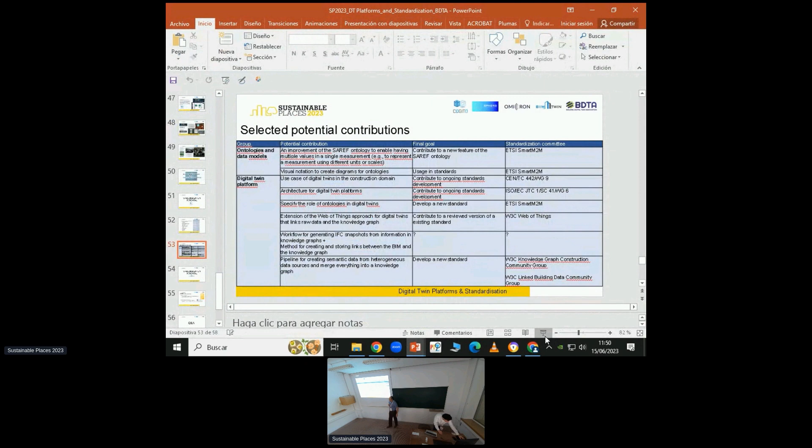Another thing we've been developing is the visual notation for creating diagrams for ontologies. Here it's not something we're going to make a standard of, because that would take much more time - we can talk about this after the end of the project, but it's something we can start applying, for example, with SAREF.

Regarding the digital twin platform, we have use cases of digital twins in the construction domain, and here we can contribute to ongoing standards. ISO subcommittee 41 on IoT and digital twins has been collecting use cases and making a technical report. We contributed one use case there, in working group 9 of the CEN committee, and have now submitted it. These are places where we can support standardization.

Another thing is the architecture for digital twin applications. Right now in ISO, the process is starting to define the technical report on architecture for digital twins - the work just started, and the plenary meeting this week is like the launch of the table of contents and things like that. It's not led by me, because I'm establishing liaison with this working group - I can give you the name of the editors.

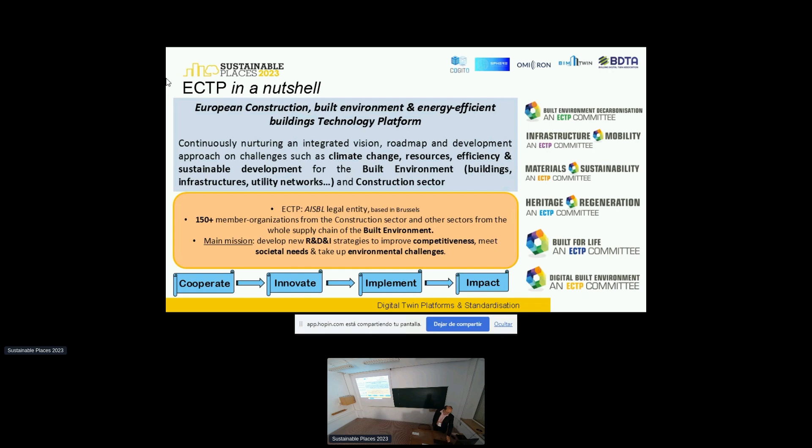In this context, like for the other committees, we develop position papers on a regular basis that are used to identify, at a given point in time, every 3 or 4 years, what are the new key trends and challenges, what are the high-level objectives we want to tackle in terms of digitalization for the construction sector, and what are the research and innovation needs. We try to identify also the connection with other ECTP committees and topics, as well as external initiatives. This is to feed the ECTP strategic research and innovation agenda. We had a new position paper in 2022 at summertime, and we finalized it.

One point which definitely raised is related to this concept of digital twin. The idea is that our view on the digital twin is that it's going to be a real dynamic view, but under a virtual form, of what is the reality around buildings or around a district or a city. So it's considering and including all the BIM aspects, which you are all familiar with, but it's also the need to extend BIM data management with dynamic and evolving management of building-related data, the need to network or link data among them, and the need to deal with semantic integration of external knowledge.

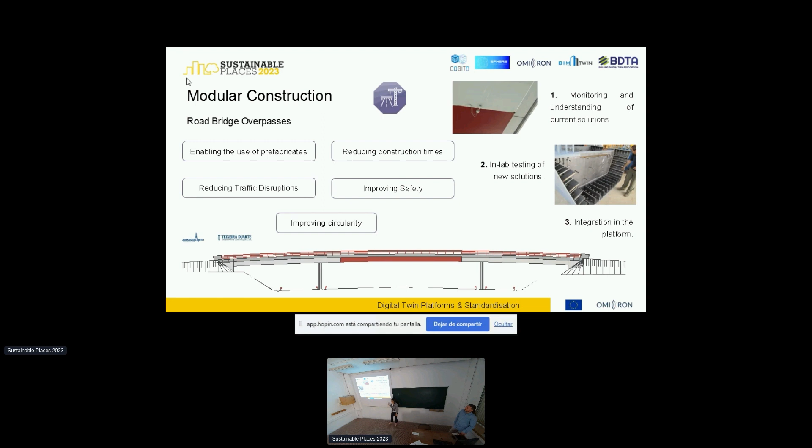What we do here is design a piece for better connection of the concrete and steel parts. The stages we follow: first we do monitoring on similar bridges to understand the problem, then we do designs and lab testing, and finally we are at the last stage now, finalizing the design, which is going to be integrated into the digital twin platform.

A relevant part of our platform is to integrate information coming from digital inspection. Here we have inspection coming from drones. We work on multi-UAV inspection and also long-range capability, working on a tech-enabled system.

We are also developing an innovative combination of cameras on board commercial vehicles for better assessment of the pavement. And as I said, we also develop V2X communication to allow communication between the maintenance crew, the control center, and also regular users.

We also develop robotic and automation procedures to facilitate the execution of ordinary, extraordinary, and emergency maintenance actions. Regarding robotization activities, we have developed a robotic modular platform to perform activities such as safety barrier replacement, safe signaling during construction, installation of cones, sealing of pavement cracks, cleaning of assets, and removal of lane markings. We are also working on automating the process for pavement rehabilitation.

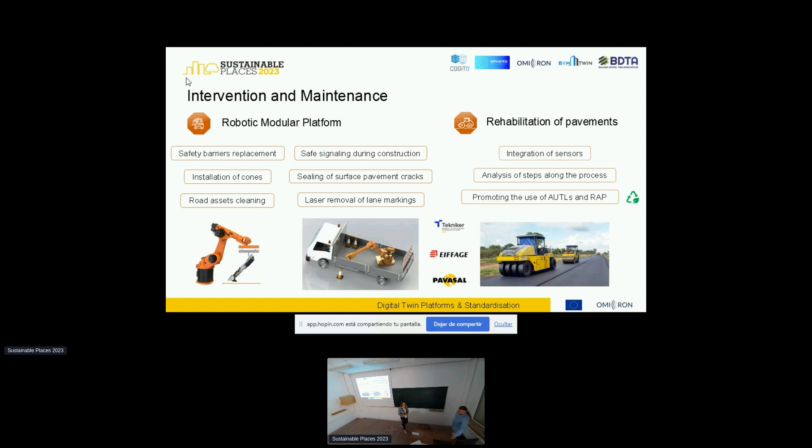In addition to the robotic activities, we develop augmented reality tools to support the workers in the use of the robotic modular platform, and we also develop virtual reality tools for the remote operation of the robotic modular platform and for the training of workers.

Finally, you can see the core of OMICRON's digital twin, composed of the digital twin itself and a road decision support system. Here you can see a visualization of some development we have for our digital twin. In this case, these developments are done in a platform developed by CEMOSA. It is not totally the OMICRON project, but follows the same procedure.

So in our road digital twin, we integrate the variety of information that we have. It is based on a BIM GIS environment, and it allows the integration of all the information and provides analytics capability.

And then connected to the road digital twin, we have a decision support system which assesses the road condition, forecasts the future state, suggests the best maintenance option, and optimizes the allocation of maintenance tasks.

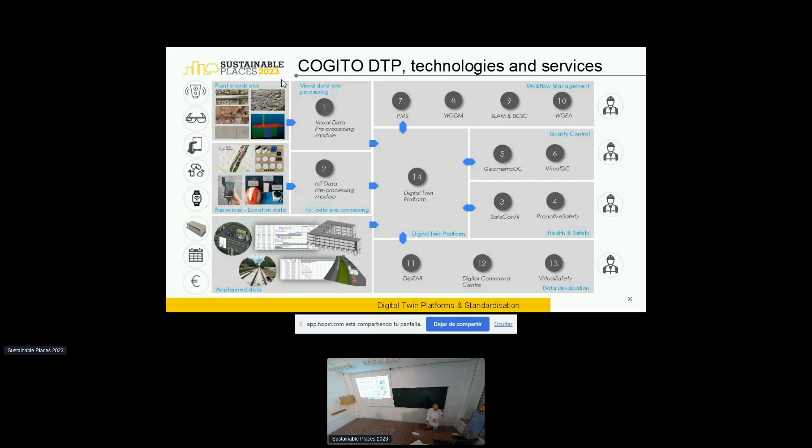The service level agreement manager and the blockchain smart contracts, and the work order execution application. We'll see details on those components in a few minutes.

So based on this conceptual information flow, we put a lot of effort into developing the architecture of the COGITO solution, where the interactions between the various components are detailed. We developed use cases and sequence diagrams that present, for each use case, the interactions between the various components. We decided, to make the conceptual architecture more reasonable and simple, to split it into two phases: the construction phase and the planning phase, where several components are involved at each phase.

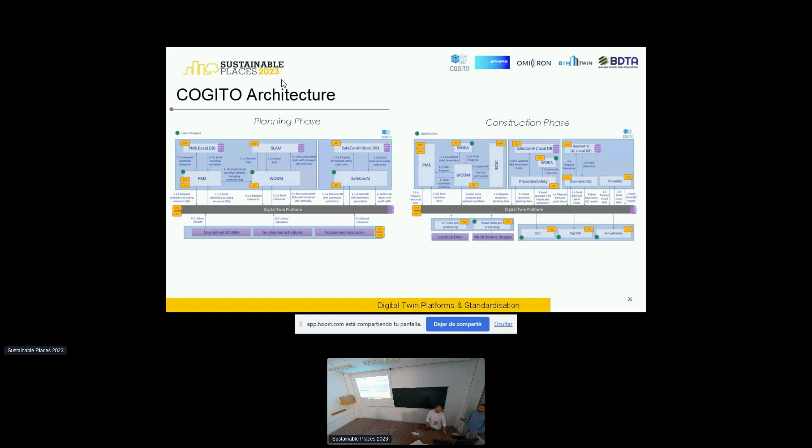I know you cannot read the text here, and that was not my intent. But it would make sense, if you find the architecture and its details interesting, to access the relevant deliverable on our website. So let's see the components in more detail.

I'll try to be quite brief, and I'll start with the digital twin applications for health and safety.

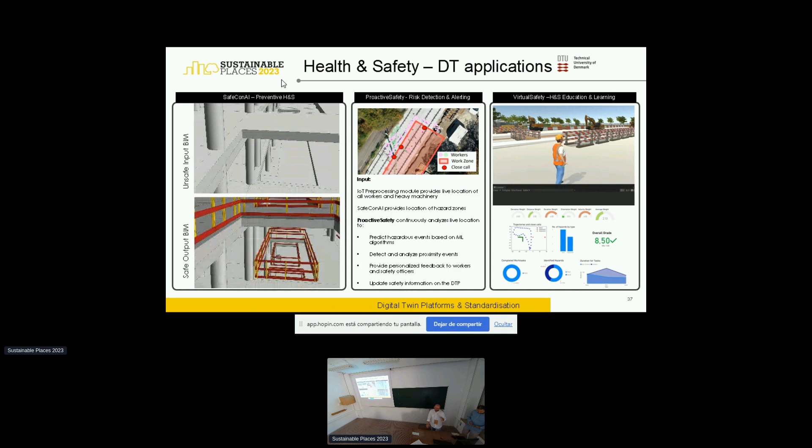On the left side, we see the SafeCon AI tool, which is applied in the planning phase for preventive health and safety, where we take as input an unsafe BIM, the output of a BIM authoring tool developed following the guidelines I mentioned before. Using specific algorithms that run on the backend, this input file is enriched with safety elements. In the video displayed, we saw how the algorithm detected hazardous areas and fall zones, and placed safety elements like railings on those zones.

The second digital twin application for health and safety is proactive safety, an application for risk detection and alerting. This component takes as input the safe BIM delivered and exported from SafeCon AI, combined with location data acquired on site, to detect proximity to hazardous areas and alert end users through specific devices they are wearing.

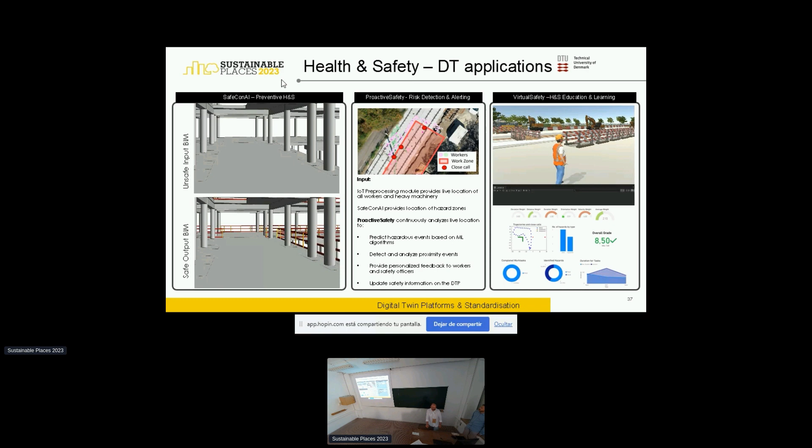Moving now to quality control, here we have four main components. First, we have the visual data pre-processing app, where we check if the video is running.

Do you have access to a mouse? No. Sorry for that, maybe I can show you the video afterwards.

The visual data processing app is a web application to curate the visual data I mentioned before and establish the linkage between the BIM elements and the data acquired on site. For example, when we scan a specific area of the construction site, we need to know how this scanned area is linked to specific BIM elements captured in IFC format. This is the tool used for curating this data. Apart from linking data acquired on site with the BIM data, there are other ways to also process the images so as to ease later use for defect detection and inspection.

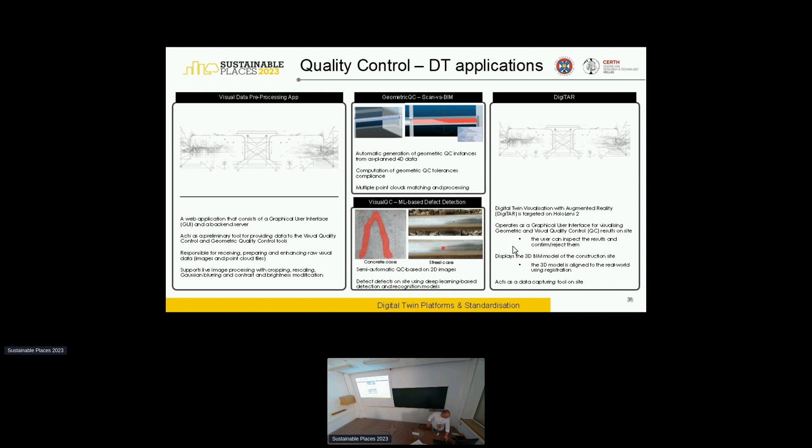Last, we have the DigiTAR application, developed to run on HoloLens 2, using smart glasses on site. The inspector or surveyor could go through the site and see annotated results from the geometric quality control and the visual quality control, and confirm the existence of such quality control results. If, for example, some defects were detected, they need to be confirmed by an expert. So we put points on where those quality control defects are located, and then the expert should visit the specific area and confirm that this defect actually exists.

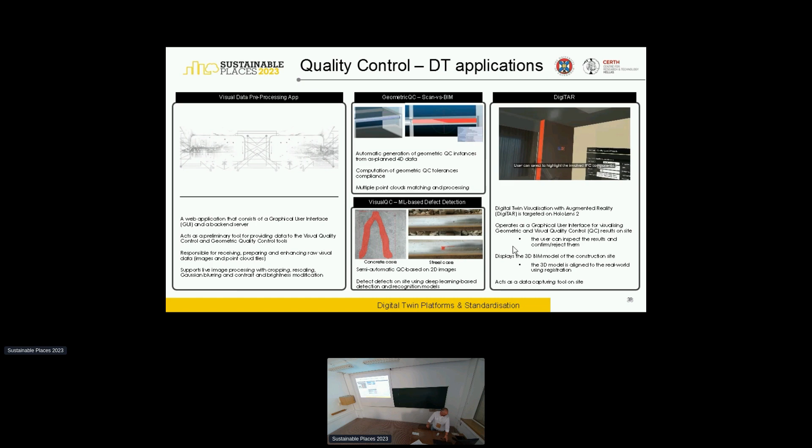Next group of digital twin applications are digital twin applications for workflow management. Here we have three main components.

The first one is the process modeling, simulation, and optimization, where we define the details regarding the workflows, the tasks that the workflow involves, but also optimization services. Through optimization algorithms running behind the scenes, we receive information about the optimal number of resources, where those resources should be allocated, and which is the critical path - all relevant to optimizing the schedule and minimizing the time and cost of the construction project.

Apart from the PMS tool, we also have the work order definition and monitoring tool. Again, it's a web application. We take as input the result of the process modeling and simulation environment and the optimization result. The user of this tool tries to assign real resources - specific people, specific equipment - to specific tasks, so that they can be monitored. Through this application, you can monitor progress on specific tasks and activities.

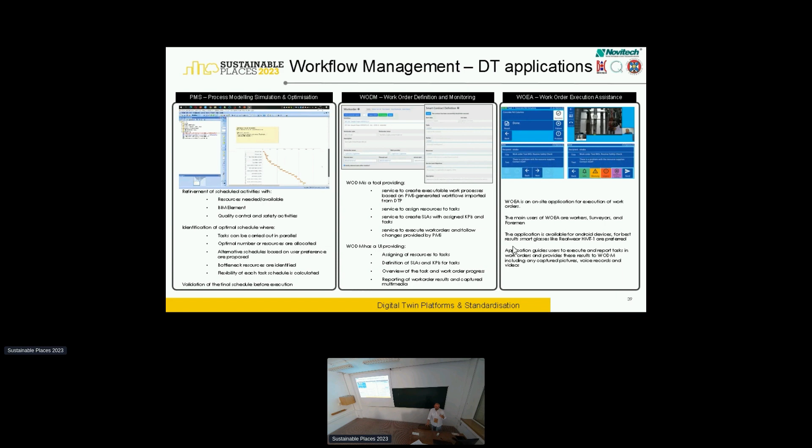As we mentioned before, all the data handling and communication between the various components developed within COGITO are managed by the digital twin platform. The digital twin platform is the core of the COGITO solution.

For its development, we followed UCL, who was leading this effort, in collaboration with UPM, who developed the data model and the ontology required.

We followed a multi-layer architecture, a six-layer architecture, consisting of the authentication layer, where this layer ensures that access to resources and applications is limited only to those end users who have access to these specific applications or resources.

The data ingestion layer is responsible for loading the input of data through the digital twin platform, but also running quality control for that data - the quality control checks, model checks, model completeness, correctness, consistency checks - and also the generation of the knowledge graph.

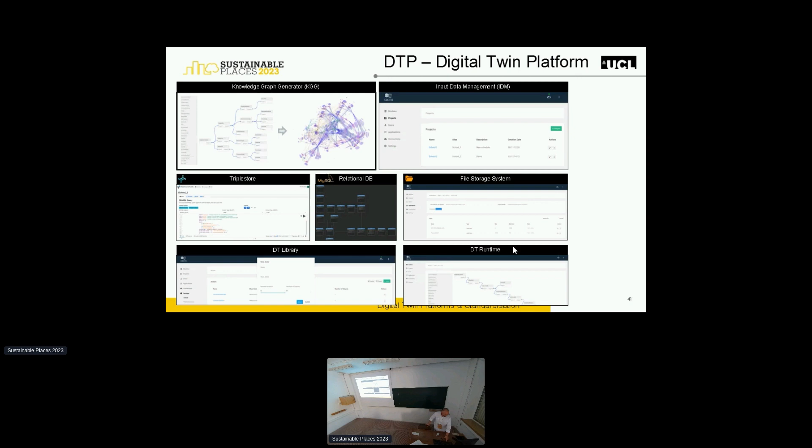Regarding the post-processing layer I mentioned before, some examples here are the BREP generation - how IFC information is converted to OBJ files to be imported in graphics engines and readable for Unity, for example - the geometry clash checker to detect clashes between elements if there are any, and the IFC optimizer, where we take the IFC file and try to reduce its size while keeping the resultant file consistent with the IFC schema.

And how we perform the model view definition checker as an individual component, to ensure that the data provided in IFC is complete with regard to the data requirements of the project, and consistent with regard to the IFC schema.

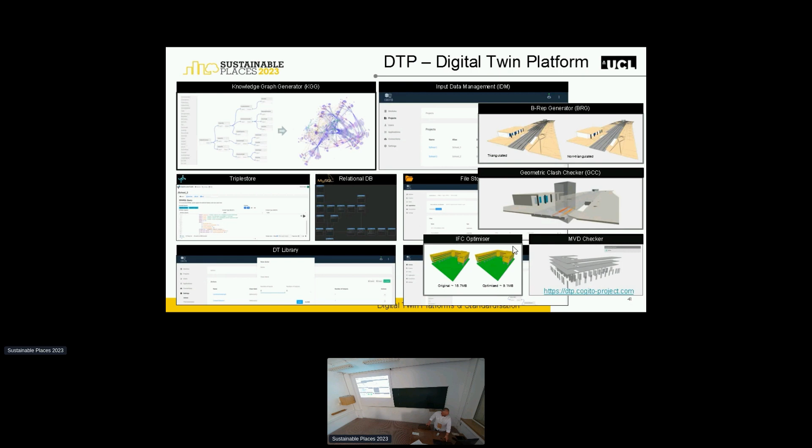This is my last slide, sorry if it takes longer than expected. The last tool is the visualization application for all the data collected in the digital twin platform. We call it DCC, Digital Command Center, and it's again a web application developed in the Unity game engine.

The different results of the digital twin applications are displayed in different overlays: the quality control overlay with regards to quality control results, the health and safety overlay with regards to health and safety application results, the location tracking overlay with regards to location data, and finally the progress, the workflow management application results in the overlay you see here.

You also have the possibility to filter the data through this user interface, based on the as-planned data or the as-built data. So maybe I'll go...

And the video was about that. So I'll skip the video and we can see it later on my machine, if you are interested.

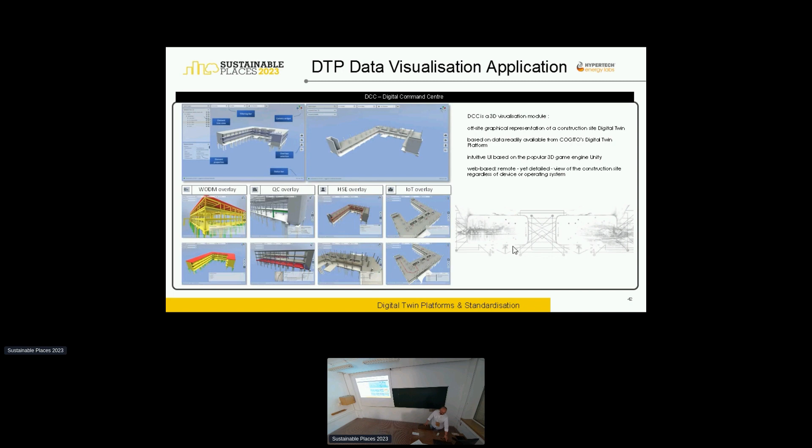So can you please take the floor? And now we will see the details of the BIM2TWIN project.

Okay, thank you. Well, these presentations raise a lot of questions, at least from my side, I'm trying to note them. That's good. So before starting, trust me, when we submitted the BIM2TWIN proposal, we did not copy COGITO documents, I swear.

As I said, in BIM2TWIN we are focusing on site activities for buildings, and our main components are on this slide. First of all, we have the digital twin platform, where several services are connected on top of it. These services either pre-process or post-process the data, as George also mentioned.

As input, we take into account the as-designed and as-planned projects, so BIM files basically and plannings, and we put that into our platform. It means we are translating IFC files or MS Project files into graphs, because the underlying technology is linked data technology, so we are based on triple store solutions.

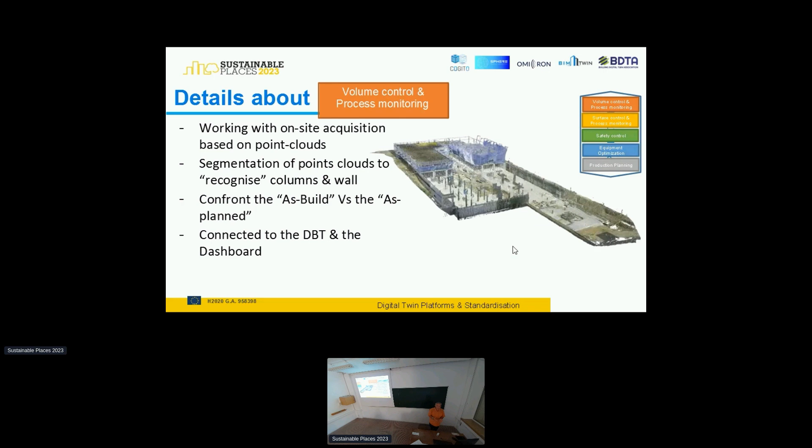based on learning techniques and with a little bit of artificial intelligence, let's say. And everything is connected to the dashboard, so to the platform, and then to our dashboard, in order to say, okay, I can update with this acquisition, I can update the KPIs concerning the quality of the volumetric aspect of my project, and I can also display on the 3D part of my dashboard where the columns are that are effectively erected at the right place, or the defaulting ones that were not erected or erected at the wrong place.

The second service is about surface control and process monitoring. I didn't put words also on the process monitoring aspect of the previous one, but you can imagine that as long as one column is detected as having a defect, it has an impact on the task belonging to this column, or the column belongs to a task, and then there is also an effect on this task, and that has an effect on the last service I'll talk about, the planning optimization. So everything is linked.

Going back to this surface control and process monitoring, we are not working with point clouds, but we are more focusing on image processing. So we have developed image recognition techniques in order to identify the built objects, like you can see on this picture.

The idea here is to say, okay, I can recognize that there are rebars, meaning we have started the construction, but it is at an initial level. We can see also some of these columns that are already done, meaning we are at a higher state in the construction, we have progress. And in between you have this middle status, where I don't know if there's some pouring concrete in it or not, but it's an intermediate status.

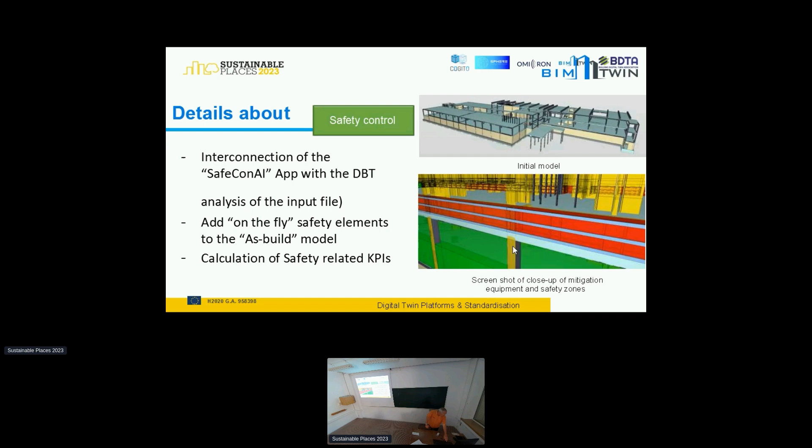We also have a service specifically focusing on equipment optimization. It's based on image and camera recognition, where the activity of equipment is recognized. They work on trajectory calculation in order to optimize the use of these big trucks and heavy equipments, but also to cross this information with safety information, analyzing if trajectories go too close to a worker's area to prevent risk.

This service works with animated images, so the camera works from videos, and is linked to the safety component in order to optimize not only the equipment but also the safety of the site.

Our last technical component is about production planning. It's a software prototype for the moment, and the idea is based on simulation to really provide what we call alternative plans, possible plans for the future that take into account the real life of the on-site activity.

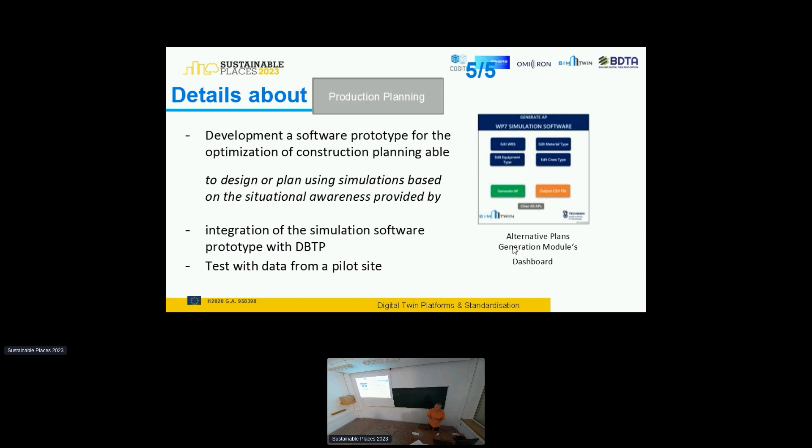A few words about the dashboard. We have this 2D dashboard providing KPI high-level information based on the calculation of several KPIs in order to follow the on-site quality at a very high level.

There's also a 3D part we can display - it's a logical view, based on the as-designed BIM initially translated into IFC, in a rough view. But here it's based on an IFC.js component, and you can see where the defaulting columns and walls are, for instance. There are several possibilities - you can see what was erected between that date and that date, in order to follow the progress of construction and also to localize where the default occurred and when.

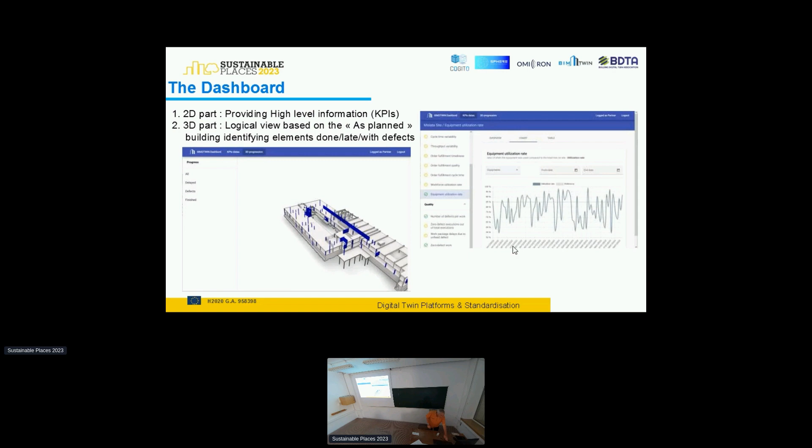And I think that is all for me.

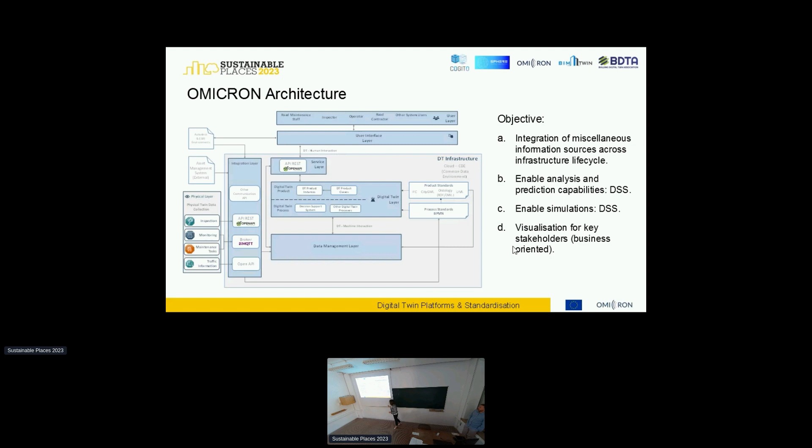It enables prediction capability, simulations, also for the decision support tool and visualization in a very nice platform, very business oriented. Now I can give some more details of the data management layer.

In our project we have a variety of data. We have dynamic data, such as the accelerometers in the bridges. We also have an asset management database, including information for the legacy system. We have static data from the geometry and the classes, and a variety of documents.

This information is stored in time series database, relational database, file system, and document management system. Then everything is orchestrated in a graph database that organizes and centralizes the information, providing the hierarchy around the different elements. This graph database is based on an ontology developed in the OMICRON project, using as reference IFC, also IOF maintenance, and IDSA.

I have explained the state of the platform, the data architecture. For the moment, we are already implementing the architecture and the data model. Everything is ready, and now we are working on the decision support system, in particular for the prediction of degradation of pavement.